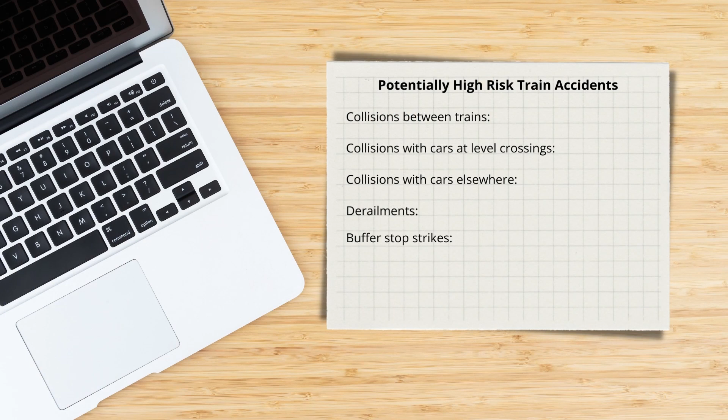In the UK, for the year April 2021 to March 2022, Office of Rail and Road official statistics show a total of 14 mainline, potentially high-risk train accidents. Out of these 14, 5 are listed as derailment under type - this is 35%. PHRTA is defined as accidents that have the greatest risk of resulting in physical injury.

The other types of incidents that fall under the PHRTA bracket are train collisions with other trains, trains colliding with cars at level crossings, or buffer stop strikes. This statistic shows that derailments are still a major risk, especially when you consider that a number of the other categories have external factors, such as cars on public roads, as a major input.

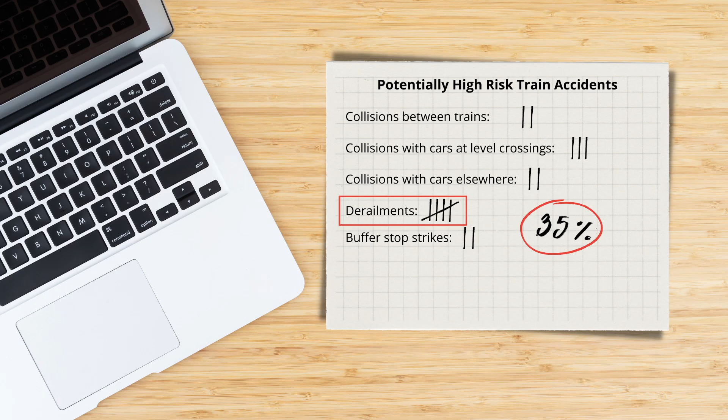Although the data is not broken down to include the causes of the derailment, it is an accepted fact that switches are a high risk and the leading cause of derailments, particularly at switch entry and through the planed or machined length. This is due to a number of factors, such as the function of switches requiring them to move, introducing variations in a number of areas that are not experienced in plain line.

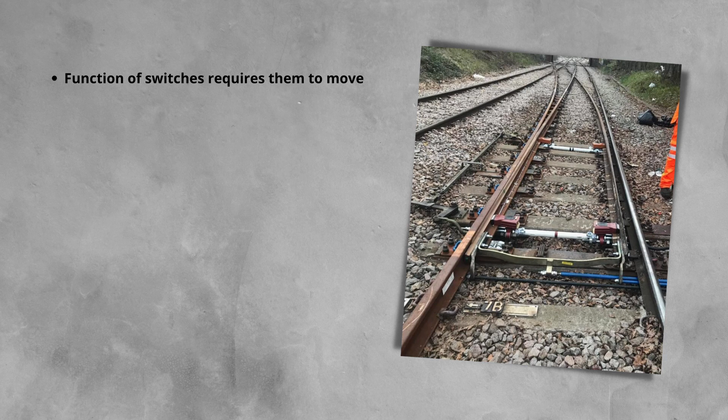This can include the setup of the POE and the fact that the switchblade has a degree of freedom in its movement. The varying nature of both the profile of the switchblade and the geometry of the turnout lead to varying wheel-rail interfaces and forces in a short area.

Switchblades are a lot more likely to be damaged, given that they are thin in profile towards the toes. Switchblades and the stock rails can experience different rates of wear depending on the usage patterns.

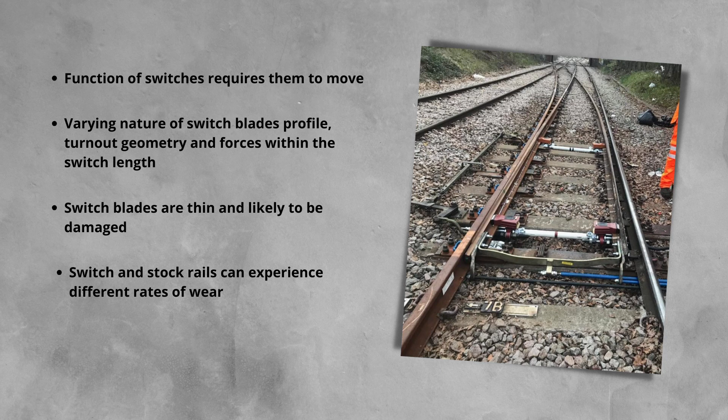Switchblades, particularly on tight radius turnouts, are subjected to large forces as they turn the train. Most derailments of switches that aren't caused by operator error have the condition or profile of the rail as a factor.

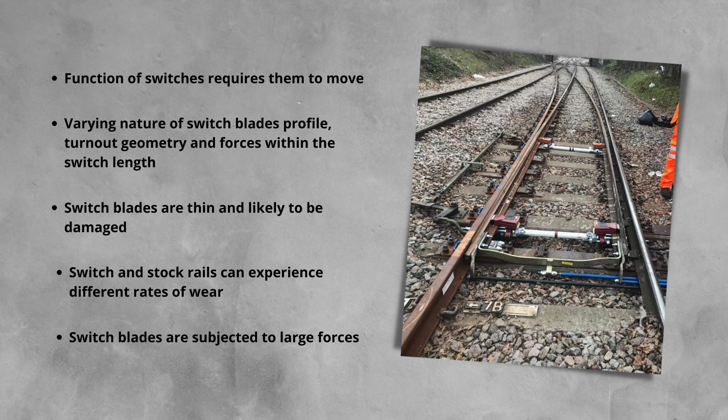From the Network Rail Standard, the inspection and repair to control the risk of derailment at switches, also known as 053 after its document number, there are 2 main types of derailment mechanisms within S&C.

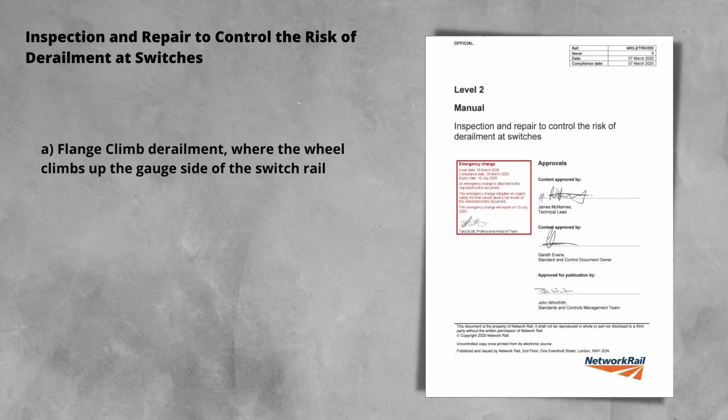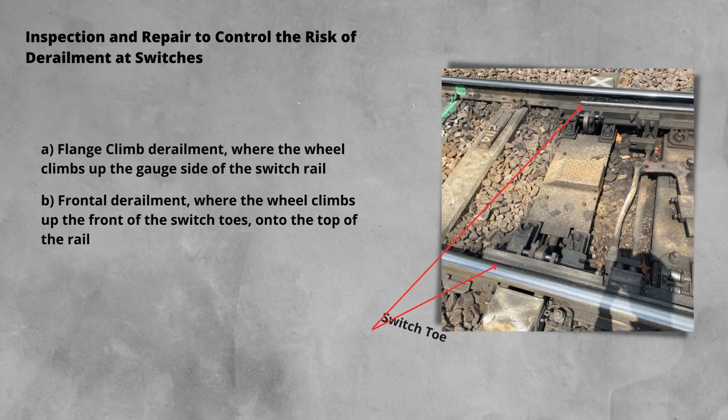First, the flange climb derailment, where the wheel climbs up the gauge side of the switch rail. Second, the frontal derailment, where the wheel climbs up the front of the switch toe and onto the top of the switch. These mechanisms are typically caused by the interaction of the wheel with a switch rail that is worn or damaged and often not lubricated.

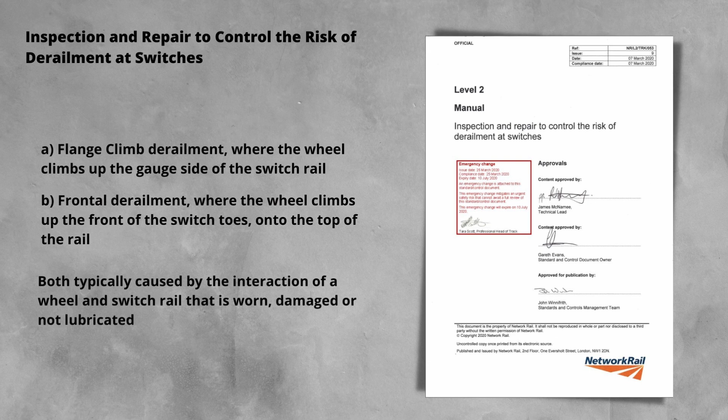Let's take a look at these in turn. So firstly, the flange climb derailment. This type of derailment is when, under the right conditions, a wheel climbs up the face of the rail.

To understand how this can happen, we need to look into the forces acting on the wheel. The 2 main forces on the wheel are the vertical force acting down from the mass or weight of the train, and the lateral force resulting from the train moving around the curve of the switch. The vertical forces, known as Q, are keeping the train wheel tread sitting on the rail. This force is in contrast to the lateral force that is pushing the wheel sideways and over the rail.

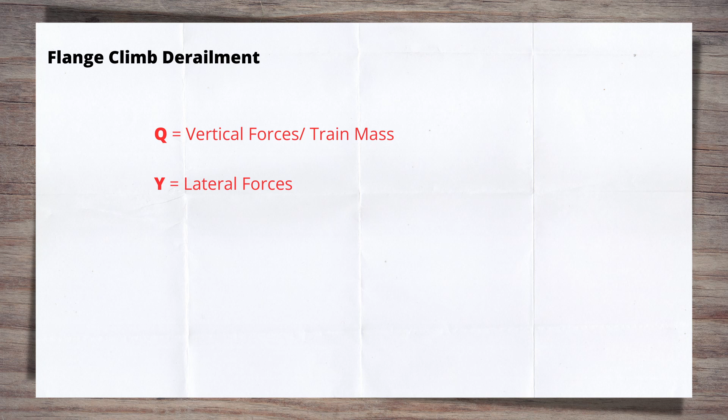There are 2 other factors to throw into the mix here. First is the wheel-rail contact angle, and secondly, the friction between the wheel and the rail. The contact angle is important because it's key in the direction of the resultant or overall force from the Q and Y forces. The friction element is also important because a high level of friction allows the wheel to gain purchase or traction on the switch rail face, making it easier to travel in an upwards direction.

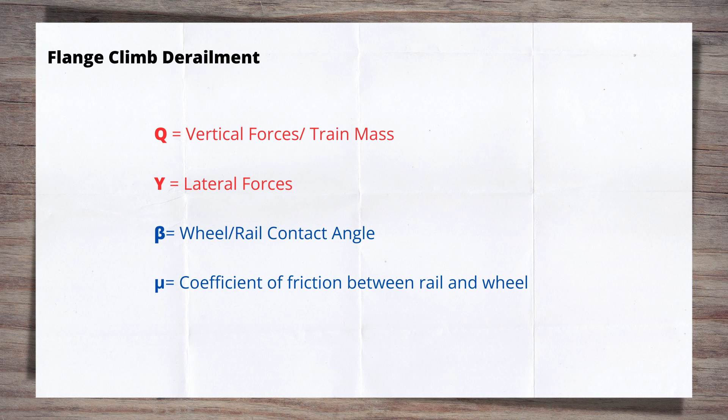So how are all of these elements pulled together and the overall risk quantified? The answer is Nadal's formula. This formula is a ratio between the Y and Q forces, and can also define a limit to this ratio, which, if exceeded, increases the risk of a flange climb derailment.

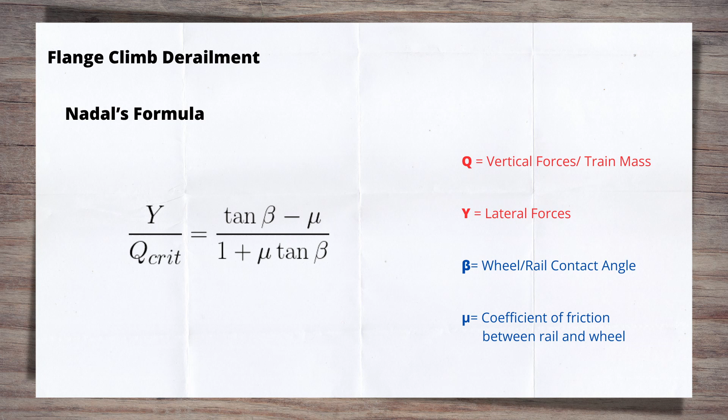Let's have a quick look at how this critical or maximum safety ratio is calculated. Our list of variables is shown on the right-hand side, and are all the forces and factors we've already discussed. Let's put these on the diagram to show where they all are.

Here we're solving for Q crit, our critical load. You can see that trigonometry is required due to the angles involved. This overall ratio of Y over Q crit gives us what is known as Nadal's limit. I do not intend to go further into the maths on this, but we will look at what this equation tells us about how changes in the different factors affect the risk of derailment.

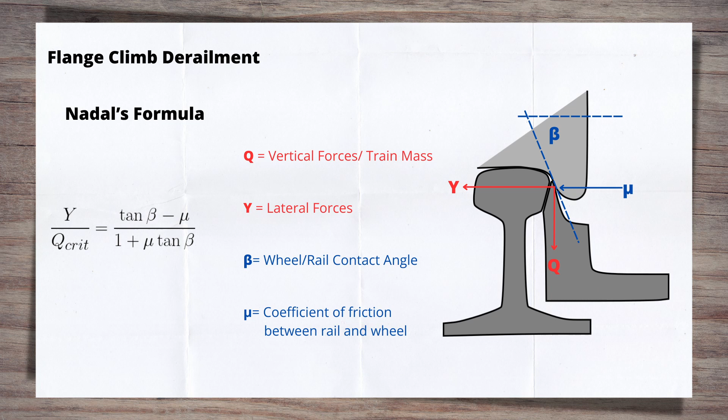Let's look at the ways the derailment risk can be reduced. Firstly, by increasing the contact angle between the wheel and the rail, or making the switch closer to vertical. This makes it harder for the wheel to climb the rail without slipping back down. The risk of the wheel climbing can be further reduced by reducing the amount of friction between the wheel and the rail. This is done by ensuring the switch rail surface is adequately lubricated.

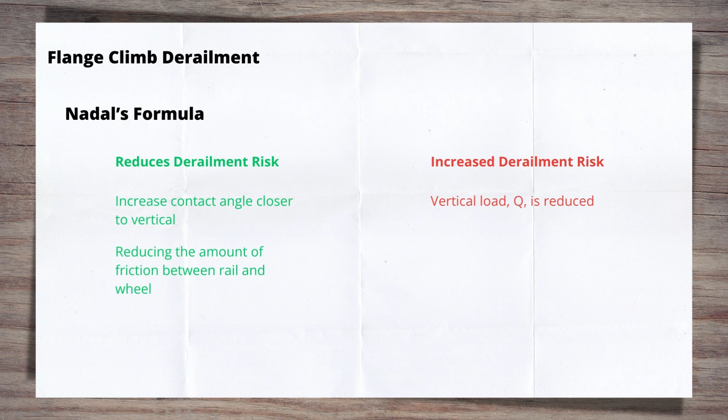These two things form a foundational part of inspection and maintenance regimes of switches, which we will look into further later in this video. But what about the forces? How does a change in Q and Y affect the derailment risk? The ratio between Y and Q is increased if the vertical load Q is reduced, or the lateral load Y is increased. The most common way this can occur is a track fault, such as a twist, either close to or within the switches. These geometry faults change, for a short distance or period of time, the forces. Twists and voiding especially lead to a load and unload cycle of the wheel, which reduces the vertical force temporarily.

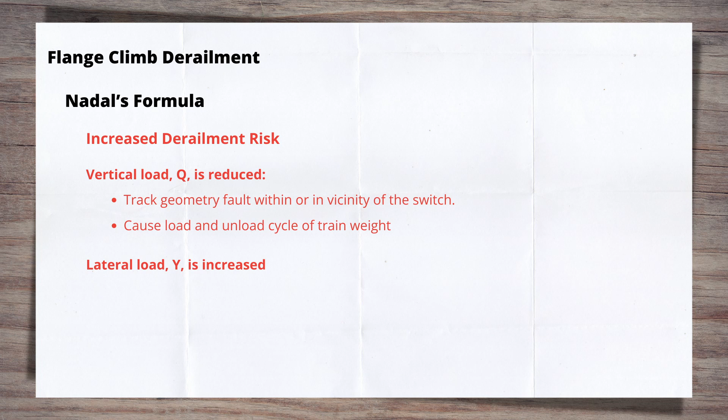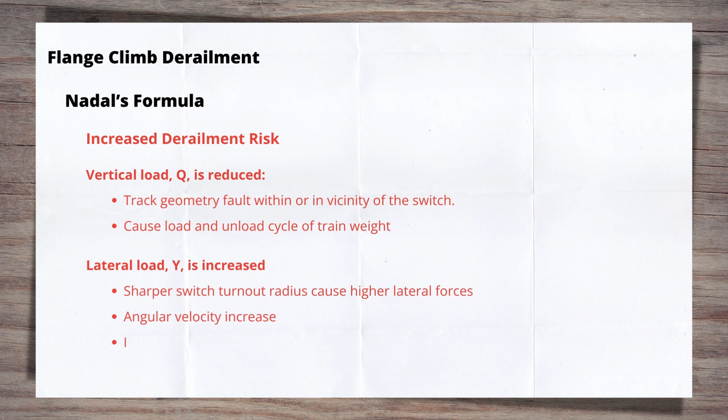The sharper the turnout radius, the higher the lateral forces, for two reasons. First, the angular velocity of the train increases, wanting to push it outwards. Secondly, what is known as the angle of attack of the wheel sets increases. In straight track, the flanges of the wheel run parallel to the running face of the rail. When on a curve or within a switch, the wheels run at an angle to the rail. The outer wheel is then angled into the rail, attacking it and trying to climb it. As the radius tightens or becomes smaller, this angle increases further. This is why shorter switches are at more risk of derailment.

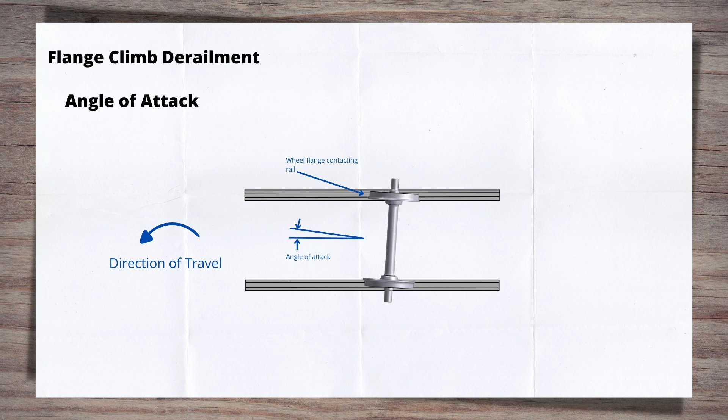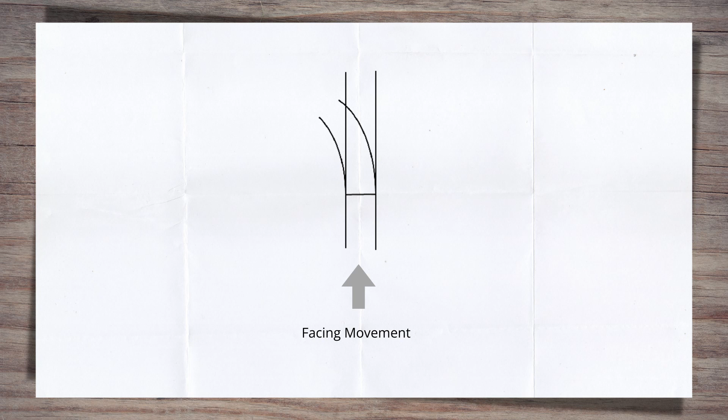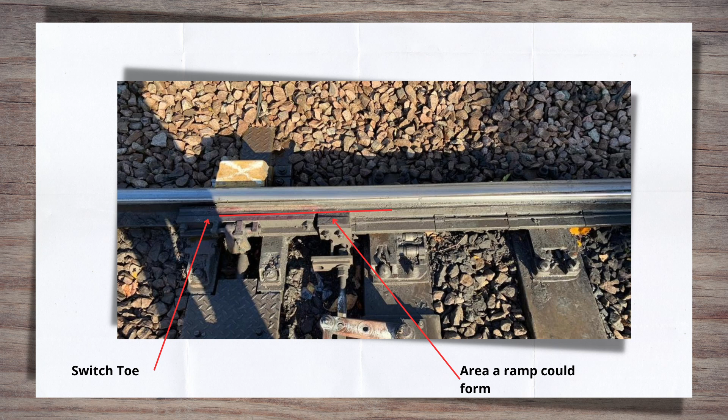So let's move on to the second derailment mechanism. This is the frontal derailment. A frontal derailment occurs when the train is making a facing move. This is when the train is travelling into the toes of the switches. The 053 standard identifies 5 hazards that can provide the means for a frontal derailment to occur. It also gives telltales to an inspector of what they might see associated with these hazards. The hazards can each, or in combination, lead to a ramp being created at the toe, allowing the wheel to travel up and over the stock rail. It could derail fully, or fall into the gap between the switch and the stock rail, splitting the points.

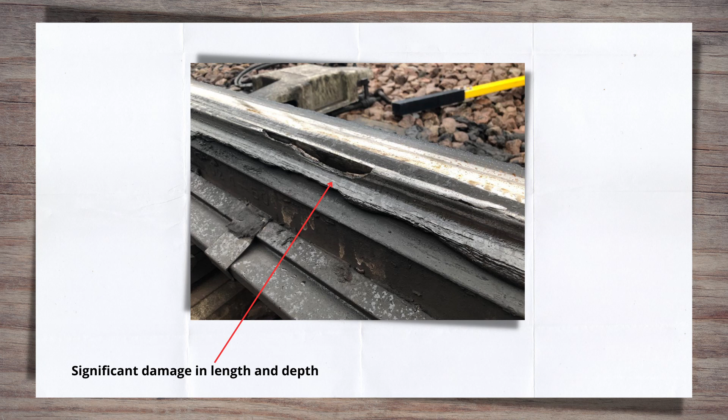Damage to a switchblade along a length and to a certain depth can also allow a wheel to effectively pass through the switchblade, again splitting the points. Let's go through these hazards. Each hazard has an overall condition followed by the key telltales. Hazards 1, 2, 3 and 5 all relate to the wheel position on the rail and the interaction that can lead to derailment. You'll also see through this that sidewear is a particular issue.

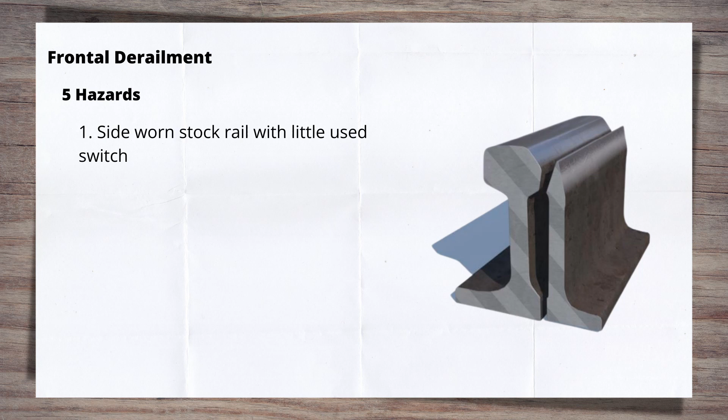First up, hazard number 1 is a side-worn stock rail with a little used switch. The telltale signs for this are: the top of the switch rail projects above the sidewear scar on the stock rail, the switch tip has been struck by wheels, and the switch rail top is deformed by wheel contact to match the shape of the stock.

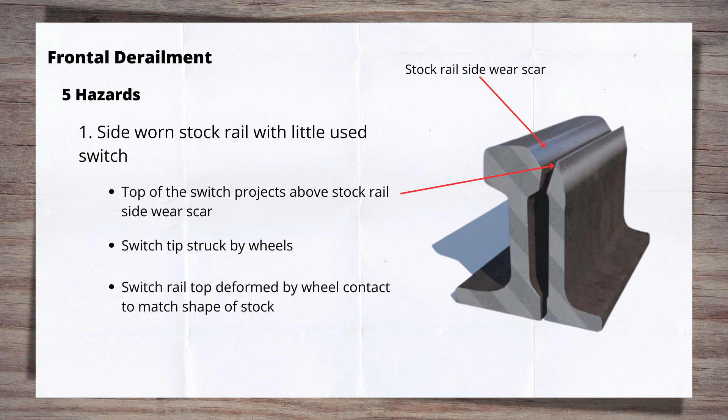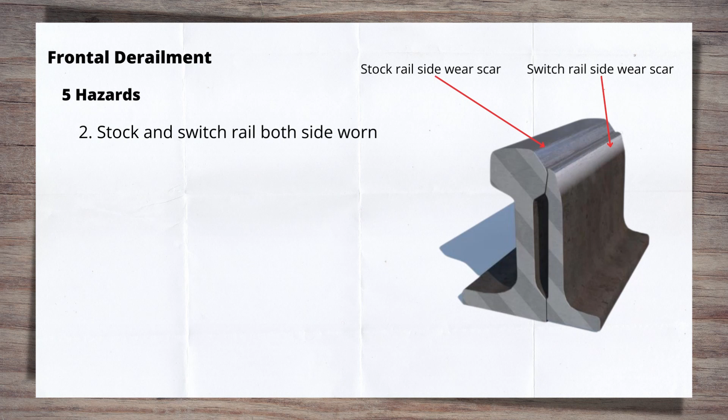Hazard number 2 is the stock rail and switch rail both being side-worn. Telltale signs of this are train wheels forming a ramp on the switch rail, and markings where a wheel has climbed the switch rail and then slipped back down.

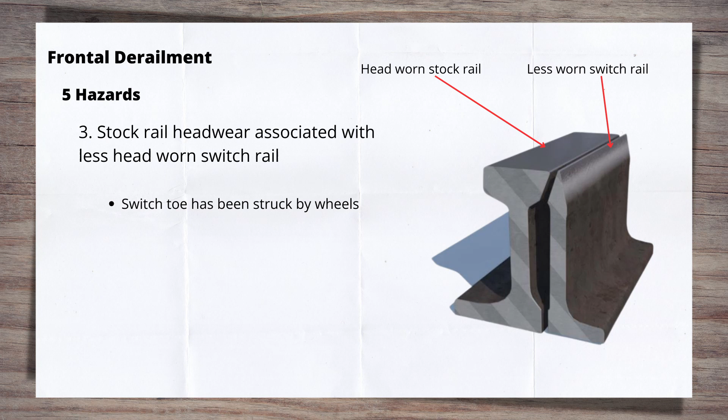Hazard 3 is a stock rail head wear associated with a less head-worn switch rail. The telltale signs of this are again a switch toe that's been struck by the wheels, or signs of flange climb within 40 mm of the toe.

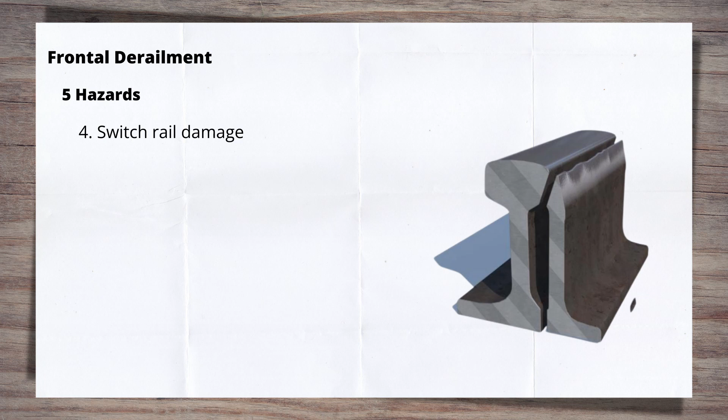Hazard number 4 is switch rail damage, which comes in a number of forms with different telltales. Lipping is present along the gauge face of the stock rail and/or along the rear of the switch rail. Lipping might also be present on the gauge face of the switch rail.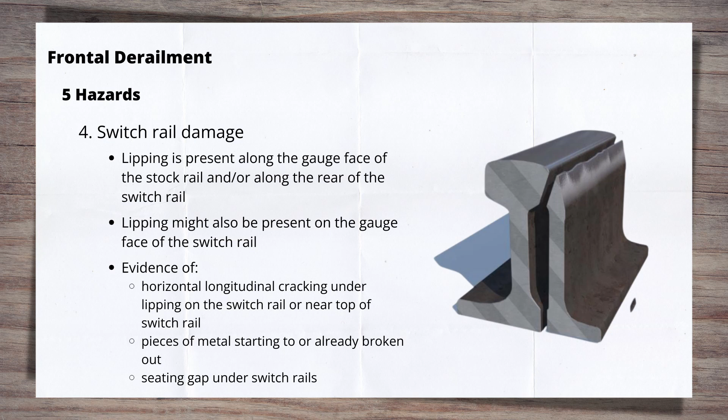There could also be evidence of horizontal longitudinal cracking under the lip of the switch rail, visible horizontal longitudinal cracking near the top of the rear face of the switch rail, small pieces of metal starting to break off the switch rail, several pieces of broken out switch rail, or a seating gap under the switch rail associated with lipping. Further damage can be caused by not treating the lipping, especially on the stock rail, as it will get dragged and pulled off by a passing train wheel.

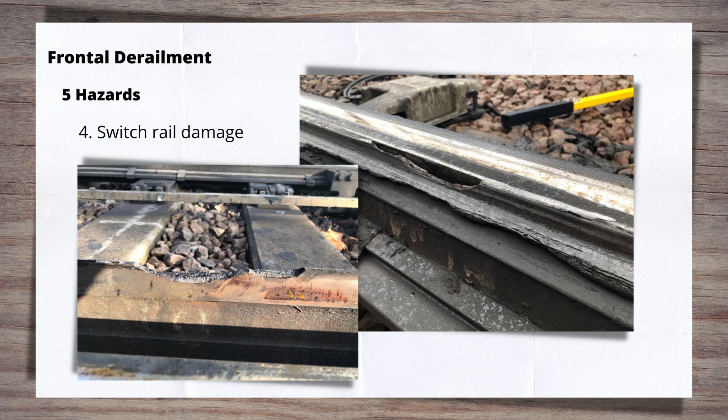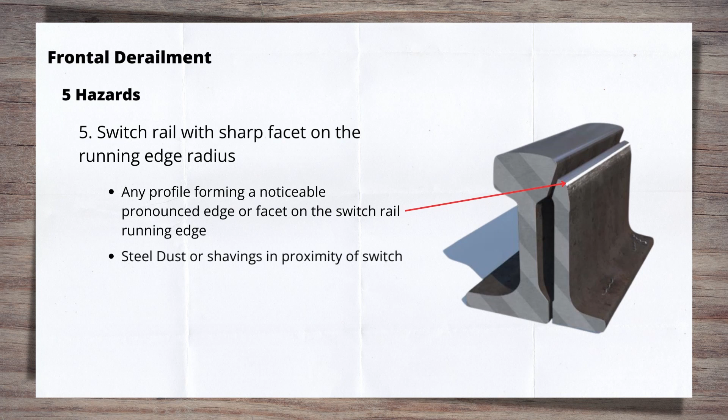Hazard 5 is a switch rail with sharp facets on the running edge radius. The telltales of this are any profile forming a noticeable, pronounced edge or facet on the switch rail running edge radius. You may see dust or shavings of steel near the switch, or bright marks indicating wheel contact with a sharp radius.

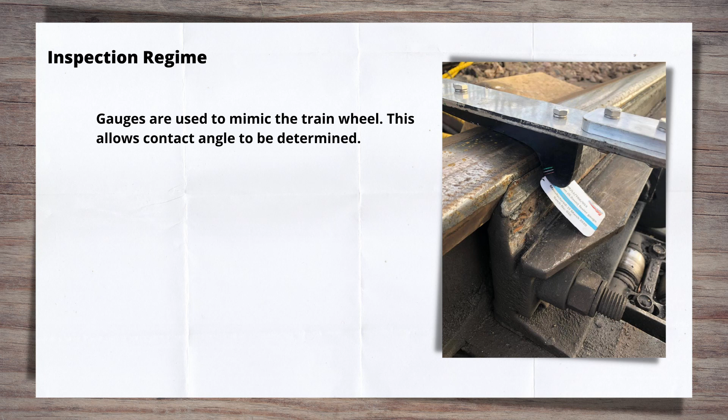So how are all of these hazards and the two derailment mechanisms controlled to stop trains derailing? This is through an effective inspection regime. Switches need to be inspected to monitor the key factors we've seen in this video. The inspections will, through the use of gauges to mimic the train wheel, determine the contact angle. This has to be 60 degrees or greater.

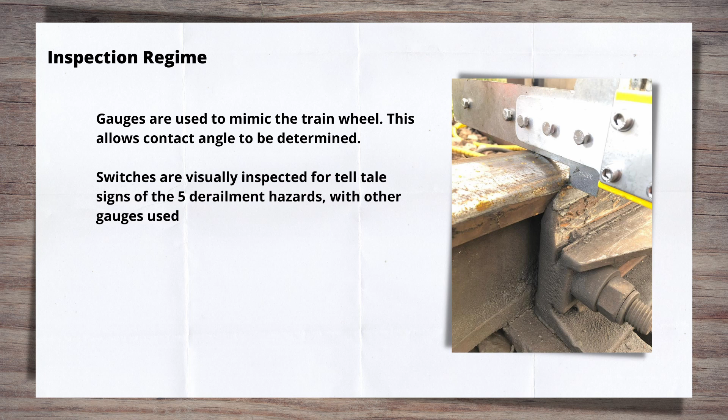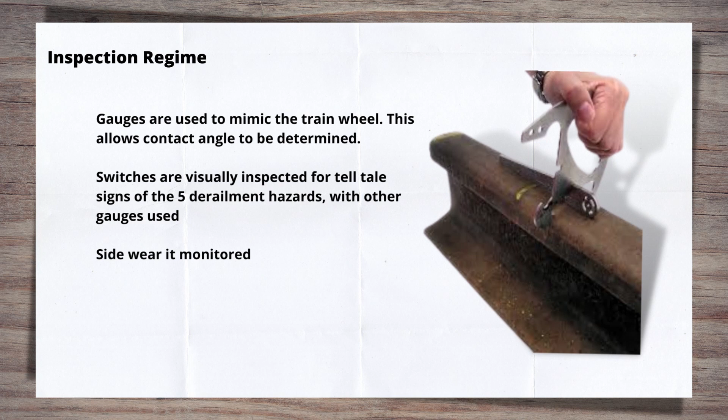You'll also look for any of the telltale signs of the five derailment hazards we've been through, through visual means as well as the use of other gauges. You'll have noticed that sidewear was mentioned a lot as part of the five hazards, so the level of sidewear on both the switch and the stock rail is monitored. Lastly, switches should be lubricated at regular intervals to help keep the Y/Q ratio below the limit.

The frequency of these inspections can vary based on the switch's characteristics and defect history. Switches with tight radii, such as short or similar flexure switches as we discussed earlier, are more at risk, so therefore need more regular inspection.

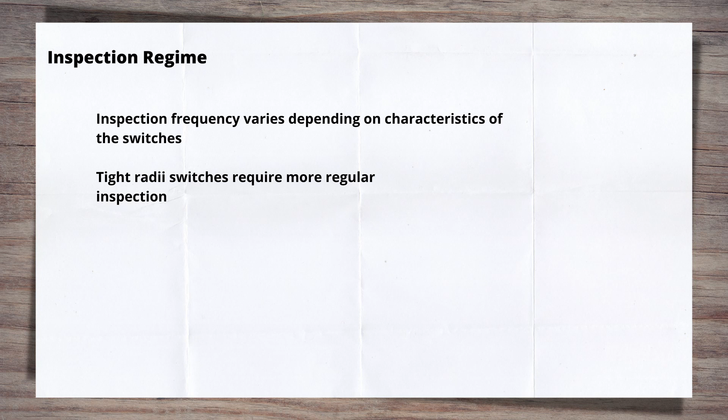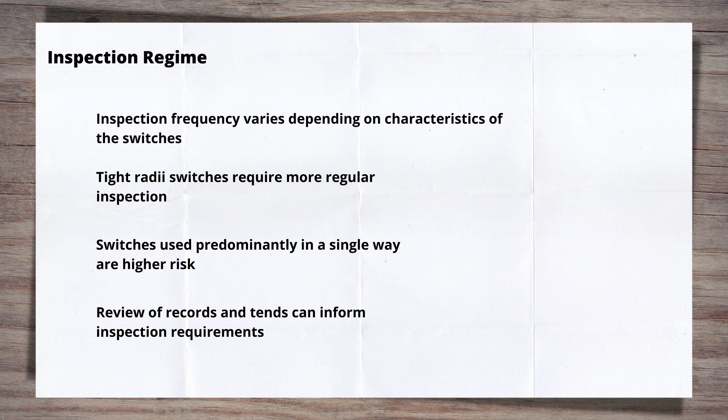The way switches are used, such as ones predominantly used in a single direction, can also be higher risk. Reviews of records and defect trends can identify specific switches that are more susceptible to defects, requiring closer monitoring. These hazards can also be removed in three main ways: grinding the switch to correct its profile and contact angle and remove lipping, weld repair to increase its height or remove damage, and ultimately replacing the half set of switches.

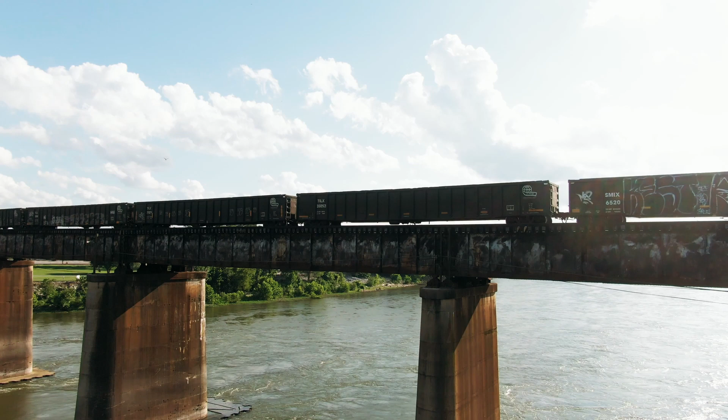So now you know the two main ways a train can derail over switches, the reasons why, and the hazards to look out for if you ever find yourself looking at a set of switches.